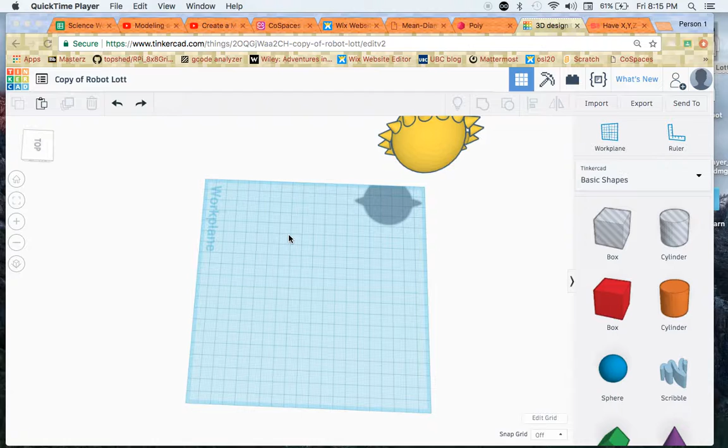Let's grab our sun and get it into CoSpaces. First thing you want to do is ensure that your sun is not grouped, so I'm going to ungroup it right there. I'm going to click on the centerpiece and just drag it out, then click delete.

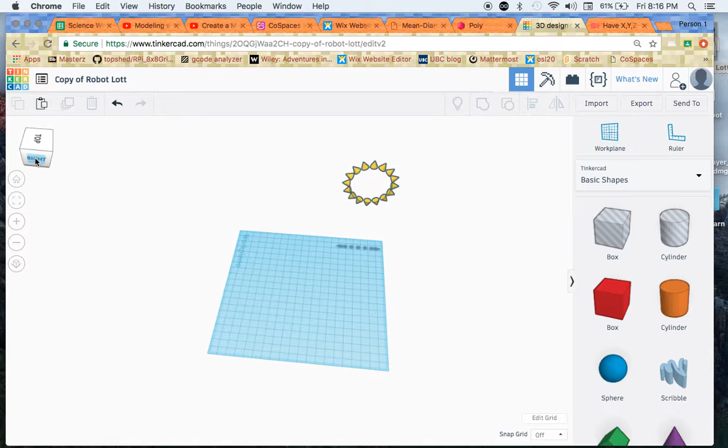Next I want to center this perfectly in the middle of my work plane, so the origin is easy to work with in CoSpaces. I'm going to grab this little box up here, rotate it this way, and click on top.

I'm just going to put a bounding box by clicking on my trackpad around my piece here. I'm going to click on this little double arrow and type in 90 to rotate it the way I want.

Once I've done that, I'll zoom in a tiny bit and click on orthographic view right here, which flattens everything out to a 2D view.

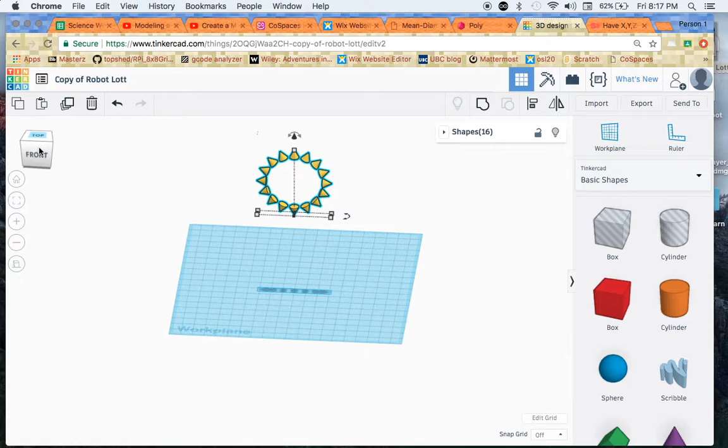Now I want to place this exactly in the center, and the center is going to be 10 up and 10 in. Let's grab my piece here and count: 10 up, 1 through 10, and then 10 in, 1 through 10. So it's going to be this piece right here. And there you go, you can see this line right here is perfectly in the center. Pretty close to perfect.

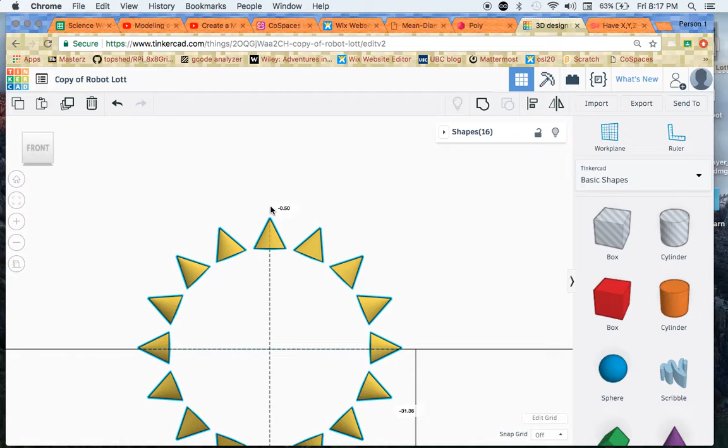Next we want to lower this down. So we're going to grab this whole thing, slide it this way, click on front, and shift my perspective a little bit up. Then I'll grab this little tiny arrow at the top and slide this so the lines on the edge are sitting right, zooming in a little to show you what I'm doing here.

You want these lines on the edge here and this point here sitting perfectly along this line. Let me just grab that little black arrow again on top and slide that down a tiny bit. That's pretty good - it might not be totally perfect, but it's pretty close.

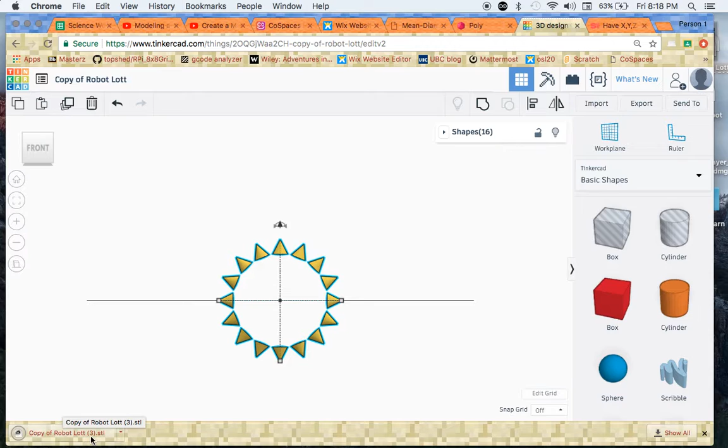Now we want to make sure we highlight the entire piece. We're going to click on export and export it as an STL. Do not export it as an OBJ, because the Z-axis is actually in a different location, so export it as an STL.

You can see it is coming in as Copy of Robot Lott (3). I think it goes to my desktop, which might be pretty messy right now - it is, but there it is right there.

So I'm going to click on CoSpaces, grab it right here, just slide it in and release, and hopefully that has brought in my object.

I'm just going to close this blocks up, move my object over to exactly where I want it, and slide it up a bit. This is a bit tricky trying to get this right. I'm just going to make it a little bit bigger and slide it down - let's see what that looks like.

Could be a little bit bigger, I think, and a little bit lower, and a little bit bigger again. Okay, let's see, that looks not bad. This part's always a bit tricky trying to get this right - good enough for now.

Move that over a tiny bit. Okay, so once we've got our piece in kind of the right location, we're going to actually code it to turn.

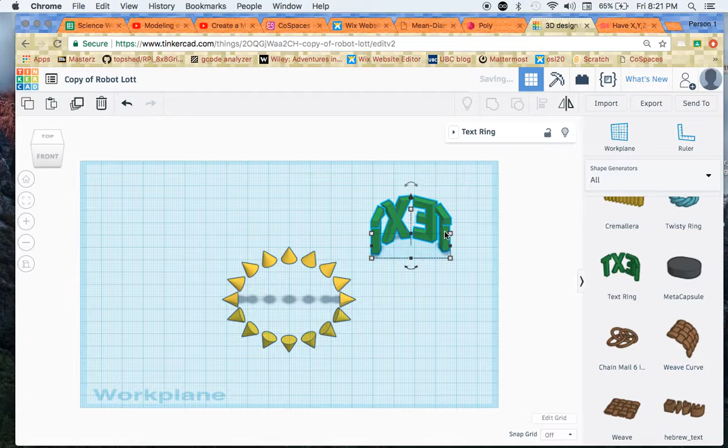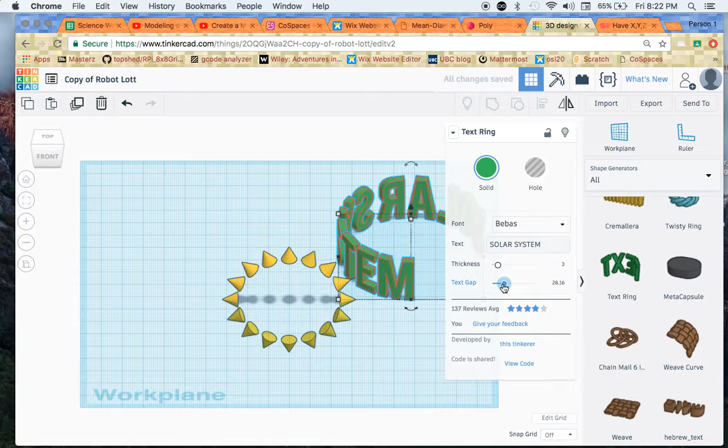There's a text generator, hopefully I can find it quickly here for you. There's one type of text there, but it is a different type of text than that - it's kind of rounded text. Nope, I wonder if it's actually back on 2. It might be - there it is, sorry, it was 2. It's called text ring. All I did was bring this in and put solar system and then wrap it around.

So I can just type in solar system here - oops, solar system. And then all I did was - oh, it's not picking it up for some reason. Oh, there it is. You can change the text gap in that to be as thick or as small as you like.

And then I just exported that out and brought it into CoSpaces.